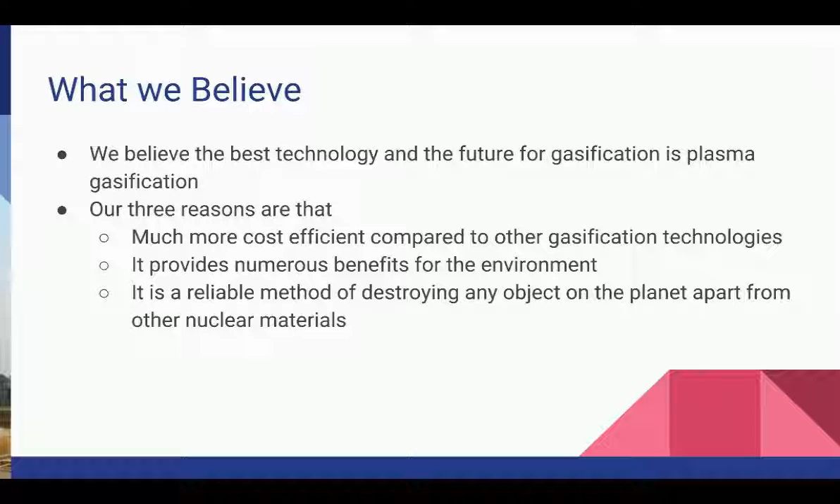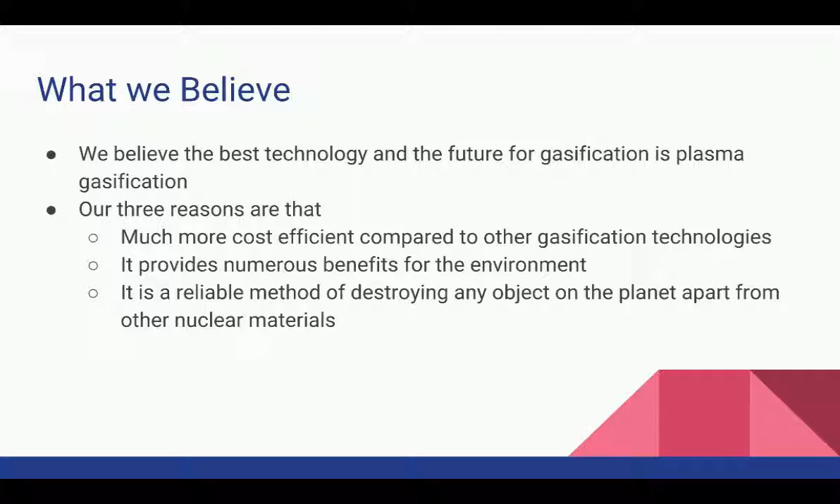We believe that the best type of gasification system would be plasma gasification. Plasma gasification is cost-effective compared to other gasification technologies. It is an effective method of removing our waste, and finally, it is self-sustainable and can provide energy.

Firstly, plasma gasification is an efficient method of removing our waste. Depending on the size of the plasma gasification reactor plant, lots of waste can be processed per day. For larger plants, it could go up to 300 tons of municipal solid waste per day.

The time for plasma gasification is shorter than other alternatives of dealing with garbage and waste. You do not have to build a place for dumping the garbage every time another one is filled. The plasma can heat up and break down the molecules of the waste fast with really high temperature.

Since it does not take a long time to break down the municipal solid waste, lots of garbage will be able to be processed every day with plasma gasification reactor plants. This is important for our system nowadays because there are more and more people, which means more products are used and more garbage is produced.

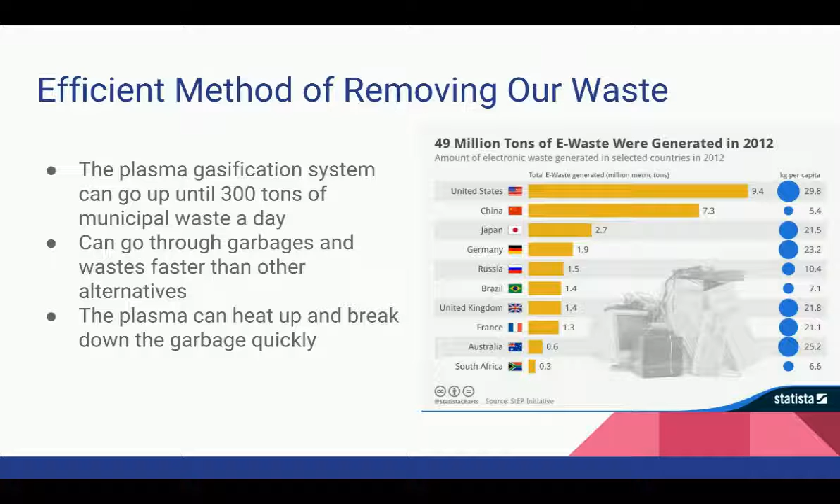If we cannot deal with the garbage or waste as fast as it is produced, it will start snowballing and there will be more and more garbage piling up in the future. Plasma gasification has the ability to deal and process garbage in a short time, which will solve the problem of too many garbage and waste being produced, so there will not be garbage piling up waiting for their turn to be processed.

Secondly, plasma gasification is cost-effective compared to other gasification technologies and economically beneficial to the city of Milton.

Plasma gasification produces syngas, and the components of syngas can be used to make other carbon-based industrial chemicals such as ethanol. Ethanol can be used in ethyl alcohol, pure alcohol, grain alcohol, and drinking alcohol. It can also be used in hand sanitizers and medical wipes.

Other than ethanol, synthesis gas itself can also be used in gas engines as fuel. It can reduce the energy cost for fuel and provide greater productivity and stability, while lower gas pressure is required compared to fuel. Also, by producing energy from the syngas, they use the energy to run the plant.

One common application for syngas is electricity generation. The syngas can undergo a combustion reaction and release energy which can be captured to transform liquid water into steam. The steam can then drive a turbine and thus generate electricity. The amount of electricity produced from a typical plasma gasification plant far exceeds the energy required to operate it.

The excess energy can then be an additional sustainable power source to the city. Roughly two-thirds of electricity produced is fed back into the grid. A typical plant would be able to provide electricity for up to 10,000 homes, and the waste steam byproduct can heat hot water for up to 1,000 homes.

In the long term, the power sold to end users will be able to pay off the initial investment made to build the plants. The reduction of costs of different products can improve the economy of the city. It does not require as much money to get other products since they are created from the waste people produce daily. It also helps reduce environmental and atmospheric pollution, as making many industrial chemical gases and fuels involves burning, which causes pollution.

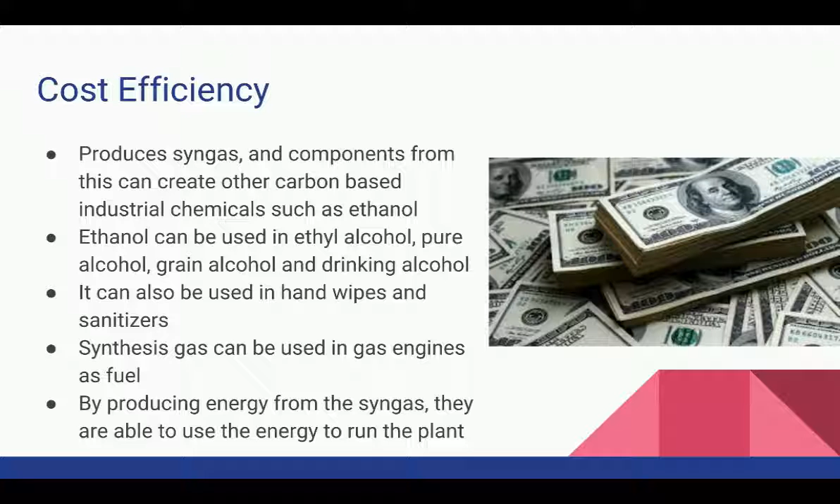The excess electricity produced from the syngas can be used as an additional power source, and in the long term will help pay off the initial investment made to build the plant.

Lastly, plasma gasification is self-sustainable and can provide energy. The syngas produced by plasma gasification is able to create more energy, which is able to self-sustain and even provide to the town. Large carbon-based molecules in plastic decompose into syngas.

Syngas is a mixture composed of hydrogen and carbon monoxide. The syngas produced from plasma gasification usually gets cleaned up first by removing minerals, particulates, sulfur, mercury, and unconverted carbon, which can be removed or reduced to low levels using processes common to the chemical and refining industries. More than 95% of the mercury can be removed.

After cleaning up the syngas, they send it to the boiler, which uses internal combustion engines or gas turbines to produce power or further convert the syngas into chemical fertilizers or fuels.

This greatly shows how the waste produced by gasification is managed and used in a way that could help provide energy for different plants. The energy can be used to provide the power required for plasma gasification, while the extra energy can be sent to different places for running other machines that require energy.

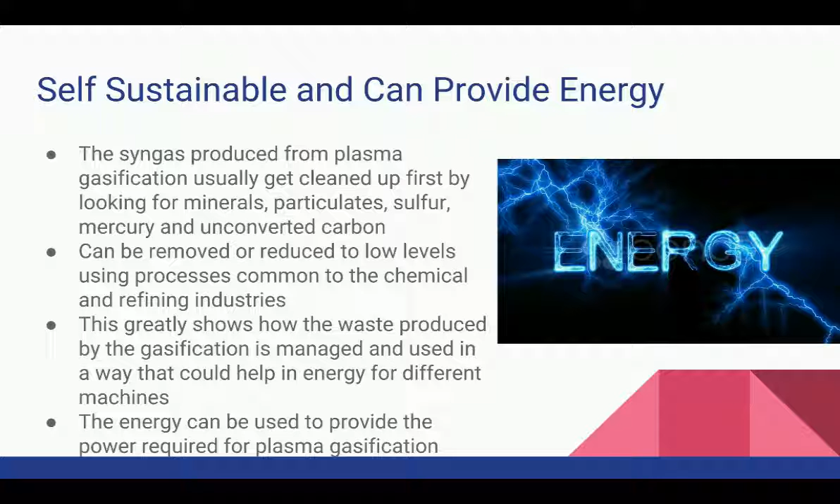Lots of technology requires energy, so it is a huge cost to provide energy for all the machines in the city. Other ways of processing garbage require energy, as does plasma gasification. The difference is that plasma gasification will be able to produce energy for itself, so it does not require other energy or expenses to deal with the waste. Furthermore, it could potentially produce extra energy to support the town and reduce the workload for other energy providers.

Some would say that plasma gasification is not environmentally friendly. They are wrong, because most of the dangerous and toxic substances are removed or cleaned up during the cleaning process of syngas. Plasma gasification does not produce pollution into the atmosphere.

Syngas will get cleaned up by removing the toxic and dangerous products. More than 95% of the mercury will be removed during the process. Even if toxic compounds like dioxin are produced, they will still be cleaned up by removing or reducing the toxic substances to lower levels.

Plasma gasification will not be producing carbon dioxide since gasification does not involve combustion. It uses little or no oxygen, and it converts carbon-based materials directly into syngas in a closed reactor with high temperature. Plasma gasification is definitely a safe and environmentally friendly way to process waste.

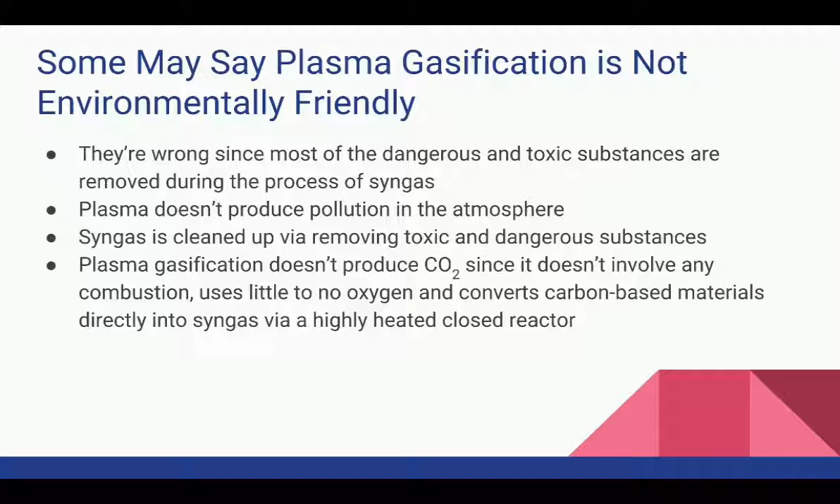In conclusion, thank you for listening to our presentation on why a plasma gasification plant is the best to use. We believe that with ourselves, Ravi and Ahmed, and the city working together, we can create an environment which is self-sustainable, can provide its own energy, is cost efficient, and is efficient in removing our waste.